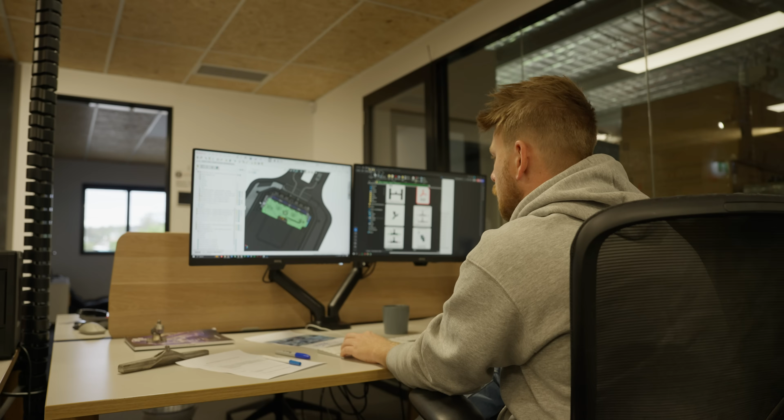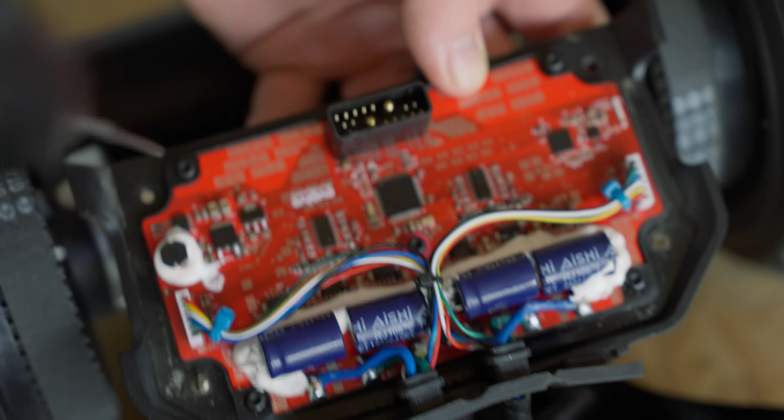The electronic system is where most of the work has been done. The heart of the board is the ESC, and the EFOC controller we built from the ground up a few years back has been the controller for all our boards since the Hadean and the GTR 2 series releases. Now for the Diablo series, we've redesigned our EFOC ESC to become version 2.0, which is stronger with up to 200 amps capabilities.

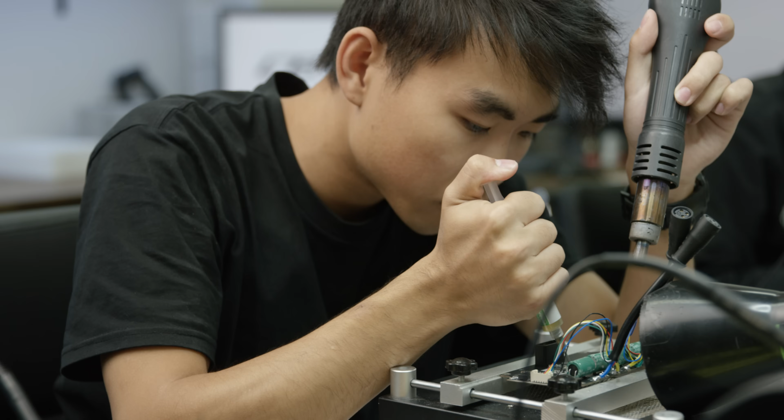It's smarter with all the new firmware sets that allow for greater performance for the rider, whilst adding new internal safety features such as system monitoring, which keeps track of all the internal components and alerts the users for any potential risks. The EFOC 2.0 PCB has had a few component modifications, which essentially has opened up the pipes, and together with the firmware tweaks has increased acceleration, braking performance, and top speed.

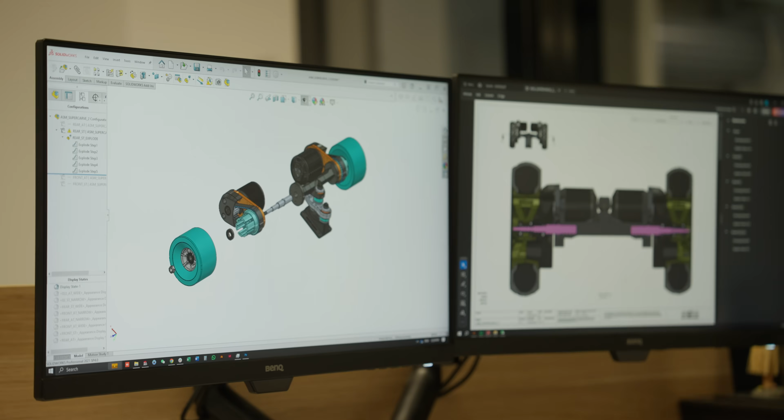We couldn't just rely on the new ESC to achieve our performance goal for the Diablo series. We had to pair the right motor to be used in conjunction with the EFOC 2.0. So we've gone bigger. We are using a 160 kV 6374 3500 watt brushless sensor motor, which plays a big part in the driving performance behind the extra power in the Diablo series.

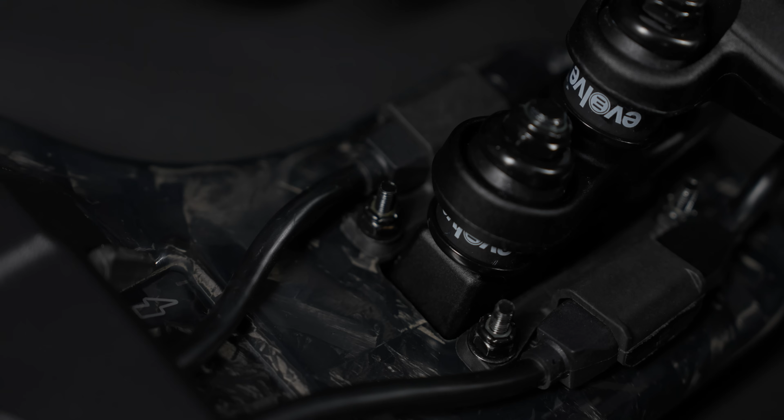Aesthetically, we've added vents to the outer motor housing, which helps with cooling and protects from debris getting inside the motor. The cable management system has also been overhauled, creating a stealthy, more secure method for keeping your cables tucked up and out of the way when riding.

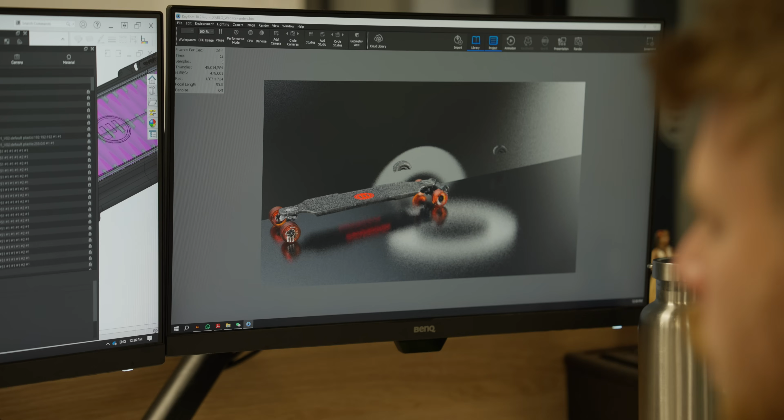Finally, the battery. The battery needed to be three things. Firstly, it needed to be able to retain the slim profile weight and the size of the existing Hadean boards. Secondly, it needed to offer the riders more ride time. And thirdly, the cells needed to be capable of drawing the current required for the performance we were aiming for.

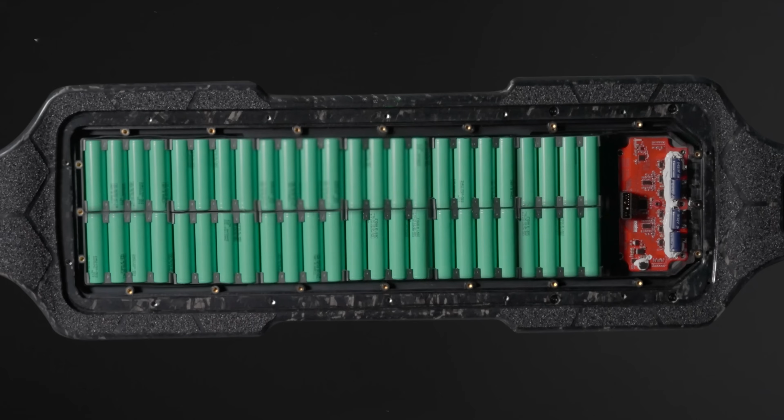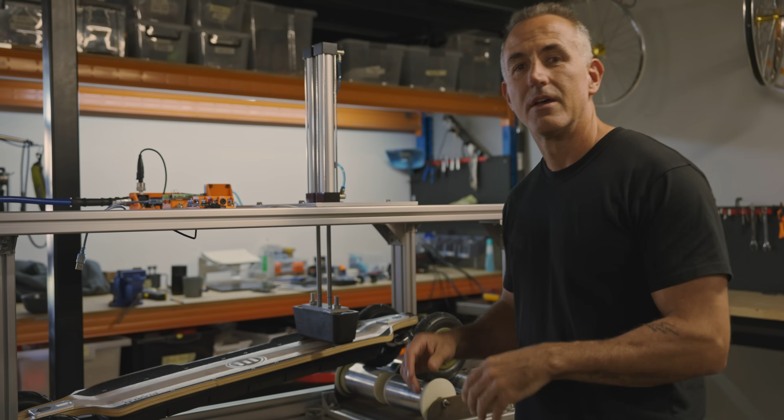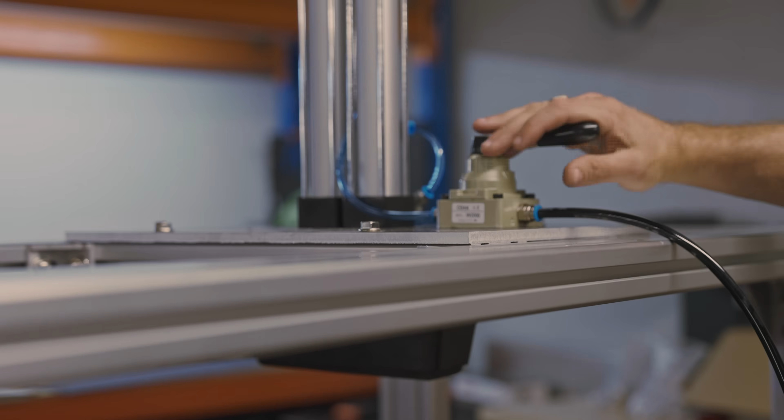So it's all good to have big motors and a big battery, but what is really important is that these parts are all working together as one system. So what we've done is we've built a bench test dyno machine, and this machine is really great because it allows us to simulate all types of real world riding under certain situations like hill or cruising or full launch.

And this allowed us to design all our firmware sets, and we can find and fine tune any sort of problems here first. Once we're happy with it, then we take it to the real world situation and destroy the board up on hills and grass and then make sure she's all good.

So we're out in the real world field testing now. We want to get some proper riding now, like real world riding. These tests are really important for us. It's real powerful and it gets fast so quick. Like you look down, it's like, oh shit.

So what we've done is we've learned everything from the bench. We've got all our protection set, for heat as well as overcurrent. We think they're performing well on the bench. Now we want to see how that translates to proper riding in the field on grass, and then does it make sense from a rider's perspective.

So what we're doing here today is we're just trying to fine tune how the Diablo responds under heavy load and torque. And we're just refining how much power really we should put into the system in comparison to where the existing stock Hadean is at. Not in this setting, we use custom mode on this. So we use the Explorer app and we've wound the power down just to get another sense of what different levels would feel like.

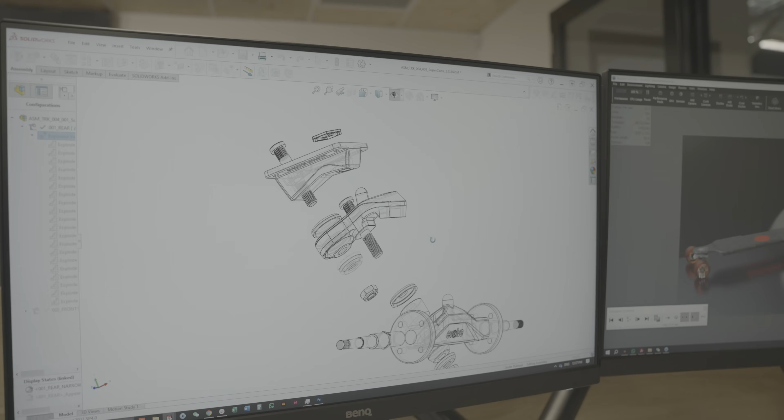But with the speed and power of the Diablo, it was time to take a look and bring out the Super Carve 2. We've refined the geometry of the arm, base plate and pivot cups to make for a smoother and more precise carve feeling.

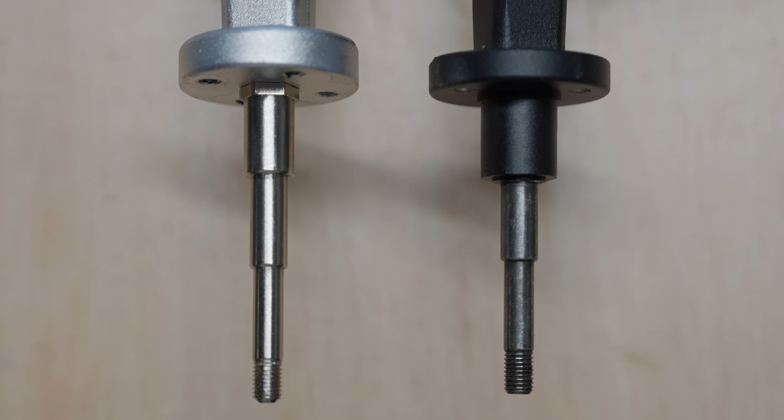We've paired this with extending the width of the axles by 20mm, which helps create a more stable base for the high speeds this board is actually capable of reaching. We've introduced a two-part strut, which includes a stepped axle design taken from the Renegade series to increase strength and serviceability, and given the overall aesthetics a redesign to complement the visual look of the rest of the board.

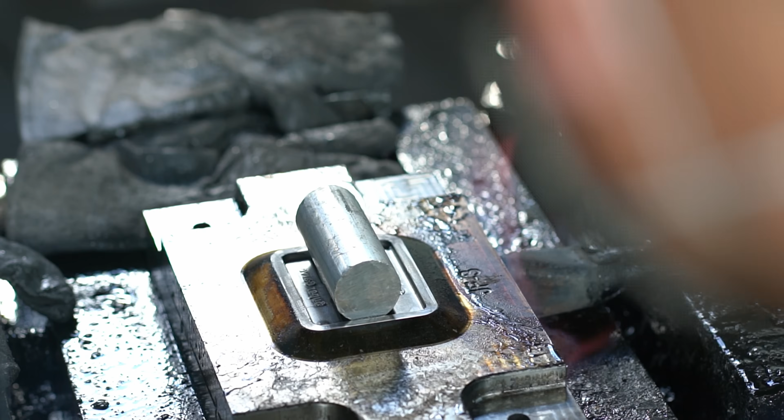The Super Carve 2 is made by using aircraft-grade aluminium billets, then it's forged under massive heat, and it's bashed into shape using a heavy press machine. Once cooled, each truck part is precision CNC'd, then they're anodized, silver for bamboo and black for carbon. They look super tough and they ride amazingly.

So when it comes to the decks, we pretty much came close to perfection on the Hadean series. However, we made a few little tweaks to the Diablo series. Let's start with bamboo. What we've done is added another fiberglass layer as well as a layer of hardwood, so the deck is a little bit firmer underfoot now, it's a bit stronger. And we've added new grip tape, so it's a coarser, grittier grip, which helps with control when you're riding.

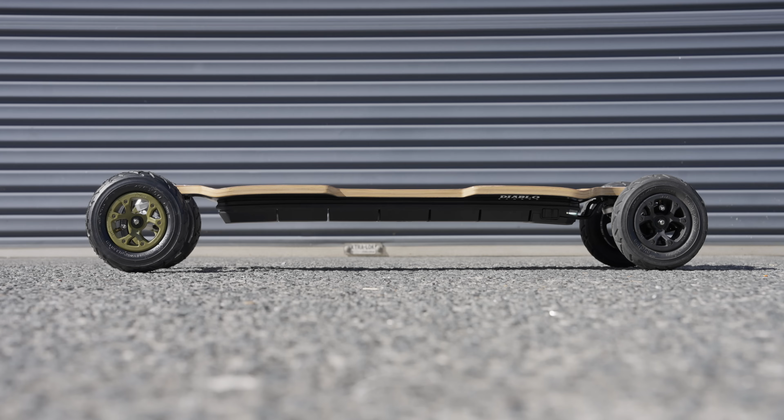And on the base plate, we've got the base plates now surface mounted on top, so it's lowered the board by about 5mm. When it comes to the carbon, we've kept the same chassis design and it's still that beautiful forged finish. But what we've adjusted here is we're using a coarser, grittier grip tape, and this allows for much more control when you're riding, so your feet feel firmly planted.

Another big improvement we've made to the bamboo Diablo is we've been trying to improve any kind of water ingress into the battery enclosure itself. So what we've done is we've made a new lid and created another inner seal. It wraps around like a boot, and you can see here, as you lift it up, it comes across and then down, and the seal also does the same thing, wrapping past the bottom case itself. This really helps with any kind of water ingress when you ride.

So it's clear, the Diablo is our fastest and most powerful board to date, but it's also our smartest. We've introduced a handful of features into the firmware to let you get the most from your board, understand its condition, and automatically protect yourself and the board if anything were to go wrong.

Okay, let me explain. Firstly, there's overcurrent protection. This feature allows the rider to hit very large current capabilities for up to 8 seconds. If the rider goes above the system threshold for 4 seconds, the remote will give a vibrate warning to the rider, warning them the current limiter will soon be enabled at the 8-second mark.

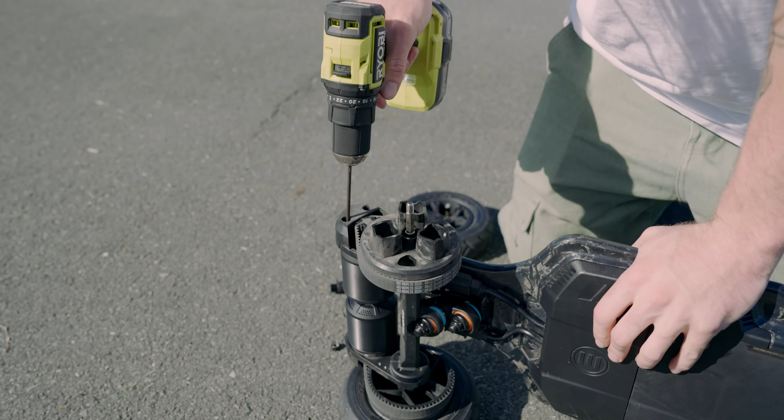I clocked it 54 kilometers per hour. That felt awesome. We're going to convert it over into street now, into our standard street setup, which is the 97mm wheel with the 38 tooth gear. Previously our boards have come out with the 32 teeth gear in street, but we've opted for the 38 tooth because it increases your torque, your braking capability, and you're about to see that the top speed is more than enough. Let's go!

So that's 50 k's an hour on the 38 tooth 97mm wheel. So that's pretty much the same as the all-terrain 7-inch 66T. So both stock setups, very much the same top end. It's been a minute since I've actually gone that fast on a urethane board, and that's the most stable I've felt. I've never ridden urethane at that speed on those new Supercarve 2.0 trucks. So as we jump into the faster setups, that's a good sign.

Let's do it. We got a brand new set of the 107mm wheels, still on the 38 tooth gears. This is going to increase our top end speed quite a bit before we swap over to those 32 tooth gears and really get that speed up there. It looks so good with these 107s.

Nice and stable, top speed of 55 kilometers per hour. Time to speed things up with the 32 tooth gears, and we'll swap back to the 97mm wheels.

We're now set up with the 97mm wheels and the 32 tooth gears, so this one's gonna go a little bit faster. That one was 56 kilometers per hour.